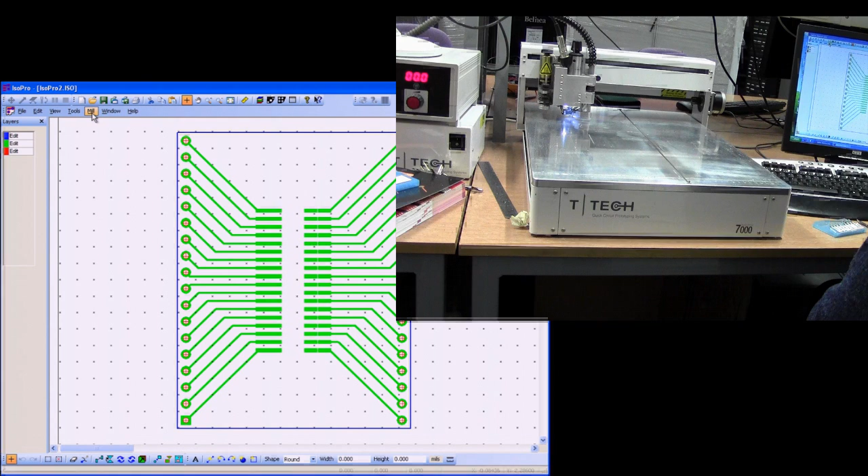And we're going to be making this board on the CNC, so I'll show you how to isolate it, set the tools, etc. and start milling. So, the first thing that we do, introduce you to the milling machine. Here we are. First thing that you need to know, this is the Y direction, and this one is the X. It's actually reversed from the standard, so it's Y and X, and that follows through on the screen as well, so you don't have to get too confused.

At the moment, the milling head's all the way at the back, so we can place some material on the bed. And when you place material on the bed, you always do it down this centre line here. So, if you've got a double-sided board, you can flip it on the centre, flip it that way. And we're going to be making our board on this here. This is a single-sided FR4.

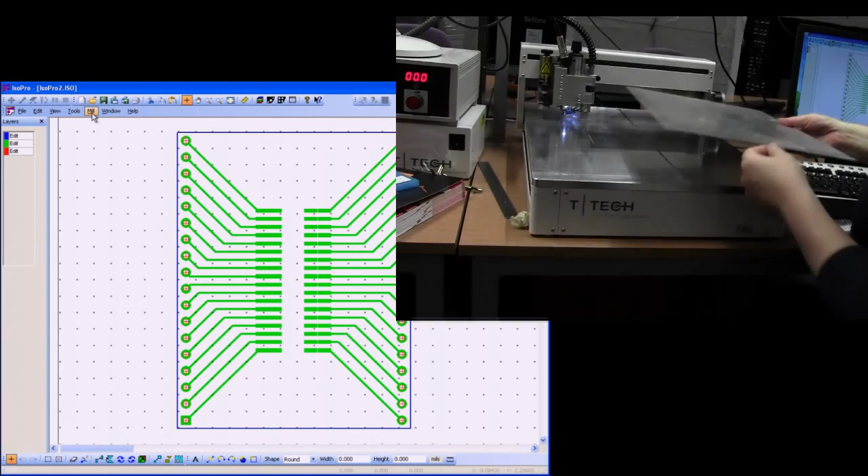Now you don't mount the material directly onto the bed. Why? Because if you drill through, you're going to drill into the bed. So, it's very important to use some of this stuff. This is backboard, and you mount it using pins. You've got pins like this, place the pin into the first one, into our origin, you place the backboard on, and you place your material. Now this one's already been pre-drilled. You've got a pin hole at the front, and a pin hole at the back.

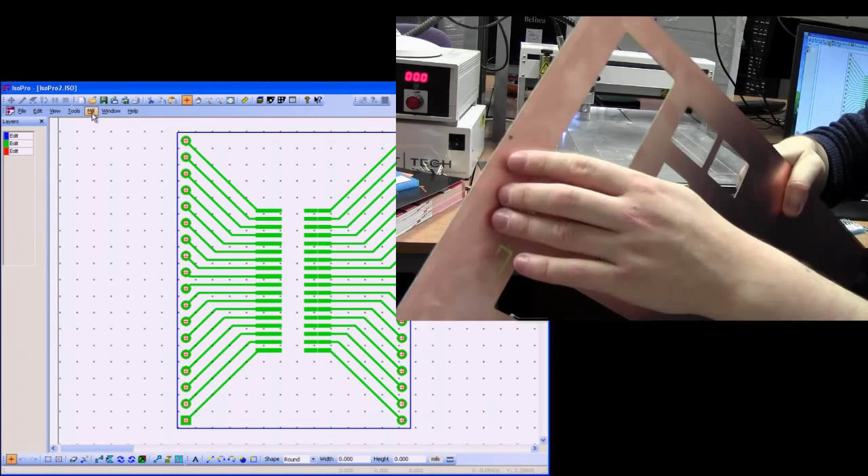So we can slap that on top of our backboard. That way when we're drilling through, we just drill through the PCB into this backboard, which is replaceable. And grab your other pin. All you do is just line up the holes at the back, slide it through your sheet of material and into this bar. Now this board doesn't move at all, so it's all aligned to the centre. So we've got our centre line, our imaginary line going right down the middle.

Masking tape, always use a bit of masking tape just to hold the board in place, just in case it does spring up. So, make sure that you tape it down. Don't tape it to the backboard in case the backboard shifts. Always make sure that you tape it down to the bed. The worst thing that you want is for this material to actually spring up, catch on the tools or on the milling foot and do a little bit of damage to the machine. So make sure it's all taped down.

Now it's very important to keep your material as flat as possible. I don't know if you can see at the back here. You can push this down, you've got a gap underneath the mill foot, it's actually hitting the foot. Same down here at the front. You've got a slight rise to the board. Now it might not look much, it might only be 0.1 millimetre, but you have to remember that you're only cutting through the copper surface, and that is only 0.1 millimetre.

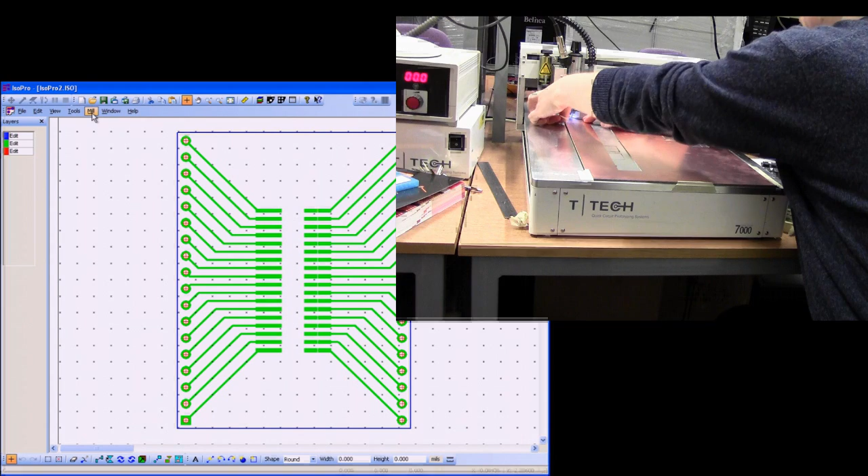So if it is raised slightly high, you can start milling the top surface here, perfectly fine. It's quite higher. When it gets over here, it's a little bit lower, where it's flush to the backboard, and it's not going to mill, so you set your height over here. So always make sure that your board is as flat as possible, and tape it down in the areas where it's particularly bad. Normally that's the corners and the edges. So our board is all taped down and in place, it's not going anywhere, it's pinned. We're ready to initialise our milling machine.

If your board hasn't got any of these holes, the pin sizes are 125 thou, working imperial, and this one's the drill, and there we have it, that's our 125. We use that to make the holes. If you make the holes the same size as the pins, everything fits nice and snug. That's how we want it.

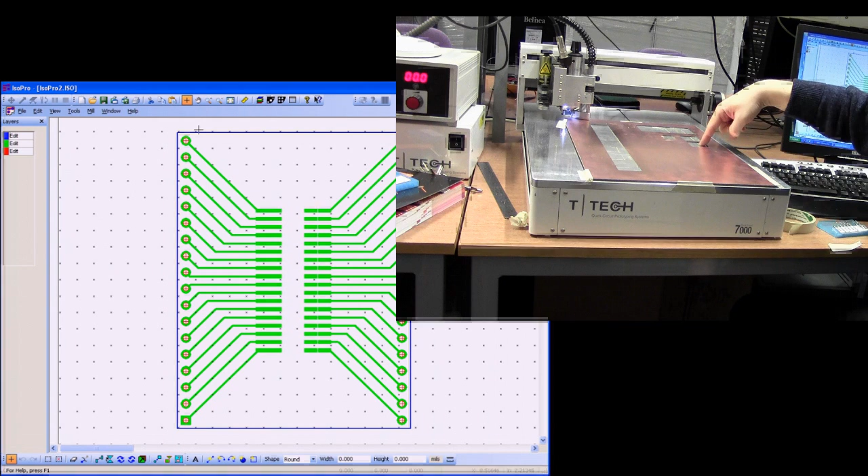Now then, where do we place it on the material? We want our circuit board to be conservative, we don't want to waste material, so I'm going to place it, say, down here, next to this little cutout that I've already done, this little PCB here that I've chopped out, and make it just below here. It's only a small one, it won't take us too long. How do we place it there?

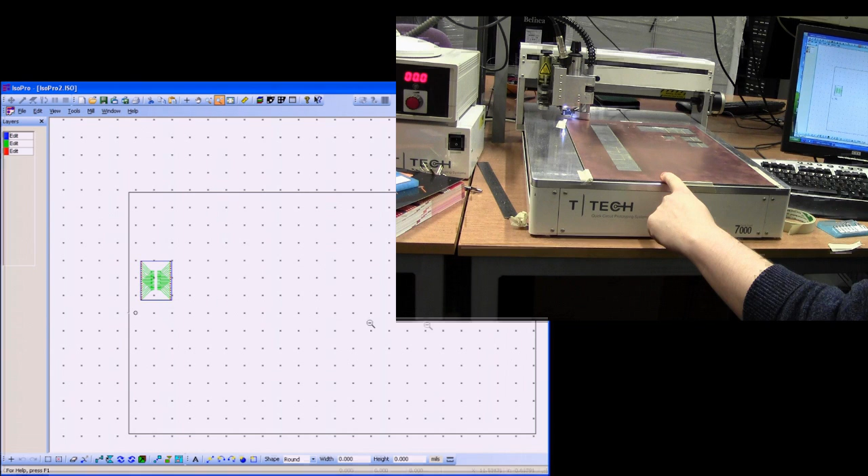Well, we place it there the same way as we do in our software. At the moment we're zoomed all the way into this PCB, so you can't see the outside area, so if we zoom out, here we are. This is our bed, and that's our design. At the moment it's positioned somewhere just here, just above our centre line. You can tell where the centre line is because we've got two circles.

You've got one here. This is our alignment pin back here, and a little circle further back. This is our origin, which everything's actually measured to. If you move your mouse over that, you can see it's almost 0, 0 on the screen. So that's our origin, that's what we measure everything to.

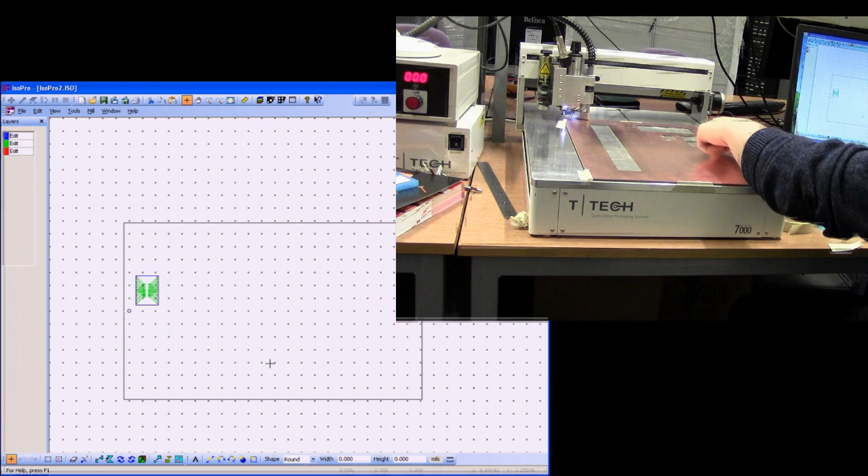Zoom out. Alright, here we are. So that's our board. We want to place it somewhere down here, somewhere around here. See, it's on the screen down here.

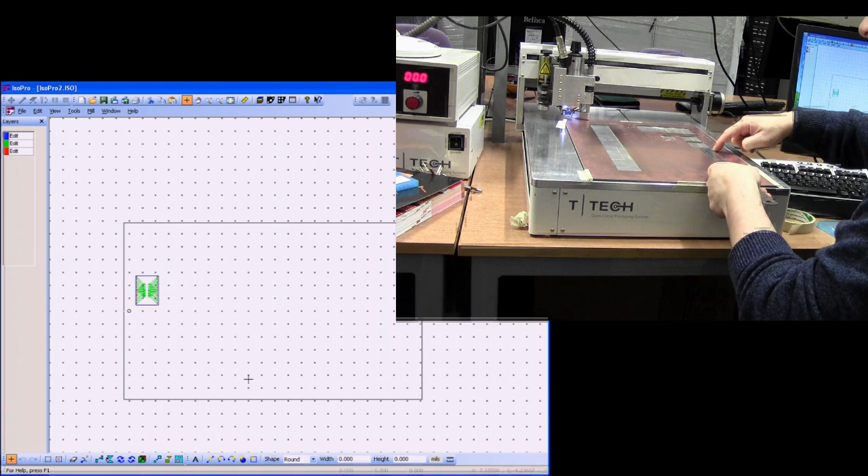So we get our ruler, the steel rule, and measure from the bottom corner, this back edge here. We want to place it close to where we had this PCB, so we measure this back corner and move this one down to where the back corner should be. It should be roughly about 13 centimetres down, so I want to leave a little bit of room, and I want to go about 22 centimetres along.

Make sure that all your layers are in edit. If they're not, right click and say edit all. Box round the lot, select the lot, we'll zoom in a little bit, say to there, so that we can place it a little bit more accurately. Grab the board. There we go, so we've got our board.

All of these X-Y positions down here are relative to our origin, so we can move roughly around a corner. We can move it down to about 20 along, 10 down. As you notice, I am in mils, so I want to change that to millimetres. So roughly about, there we go, 25, 12 down, somewhere around there, it's good enough. So that's where we want to place our board.

So we're ready to start processing this PCB. Now, this is the top side of my PCB, surface mount, so I don't need to flip it because I'm not working on the bottom side. If this was a single-sided design and it was through hole and this copper was on the bottom side, I'd have to mirror this.

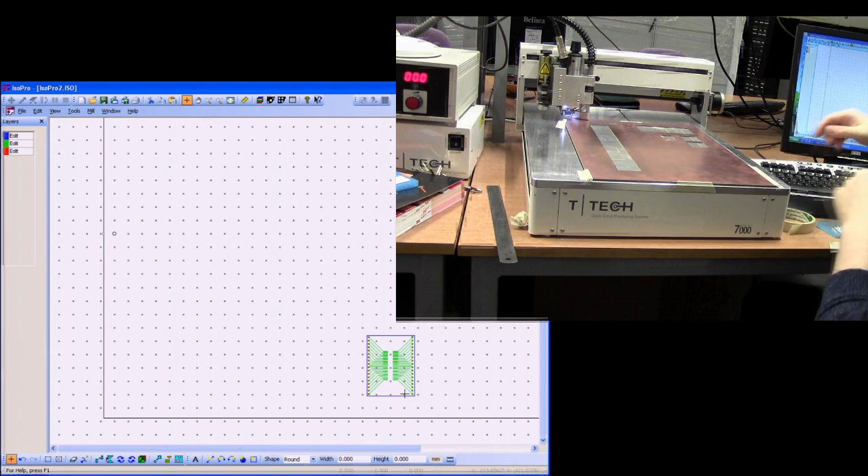Just like you would do for etching, if you were working on the bottom side, you mirror your bottom side, so that when you flip the board back and the copper's at the bottom, everything's the right way round and orientated correctly. But in this case, I don't have to mirror. If you do have to mirror, you've got the mirror function down here, and it gives you a little tooltip called mirror.

The one next to it is offset. If you did want to place this board a little bit more accurately, you can use the offset function and click on that. Probably not, because I haven't got the machine initialized. But you can do an offset to set values and so on.

There's the mirror. As you can see, if you hit the mirror, it flips it, so you're working on the opposite side. Flip it back, it flips it to the top, because we've placed it down here. If you flip the material, what was here is now up here, so it mirrors it to the top and there's no shifting about. It does mirror it around the centre line, but I don't have to mirror in this case because I'm working on the top side.

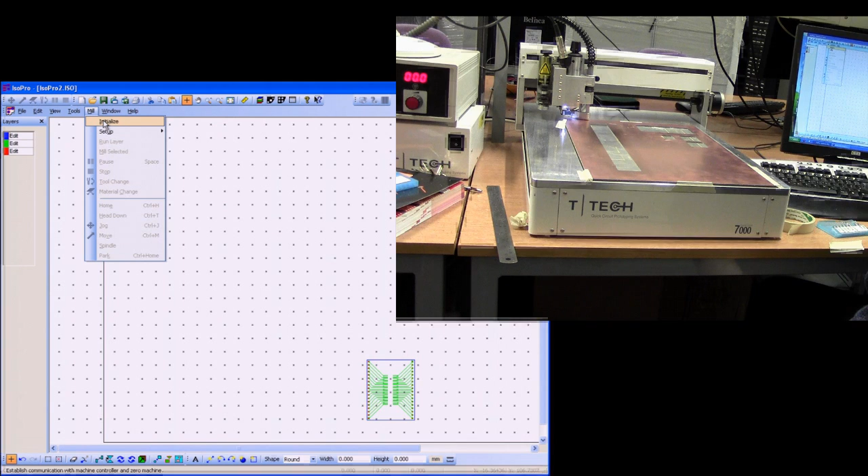Now then, working down here, we need to initialise our milling machine. So switch everything on: switch the speed controller on, switch the vacuum on, switch the control box on, which everything plugs into, and we initialise.

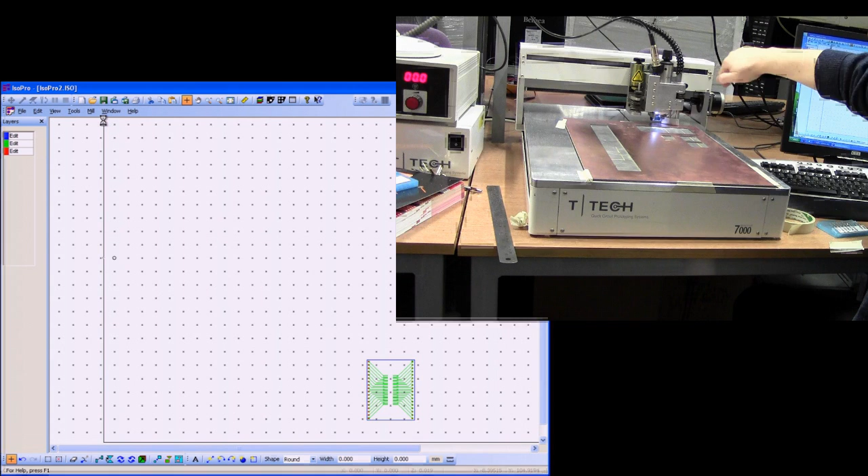The program will shift the mill head all the way across to the right hand side. It will juggle it a few times to make sure it's at its maximum. It'll bring it all the way forward, same thing down here, and it will count back until it gets to its origin. So it zeroes the head, sets its home position. If the machine knows where 0 is, then all our measurements, just like our curve with X and Y, are taken from the origin. It knows exactly where everything is. It is quite accurate.

Come on, hurry up, it's so slow doing this bit. But it needs to be.

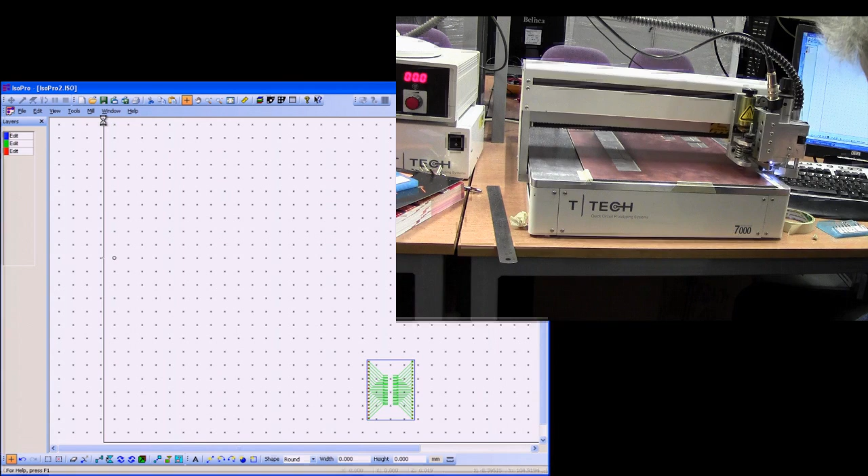Raise it forwards. And there we go. And here we have it. Milling head, everything's all centred, and as you can see, the chuck is slightly back away from the alignment pin. That's because the zero hole, our alignment hole which I showed you back here, is our origin alignment. Okay, so that's all set up.

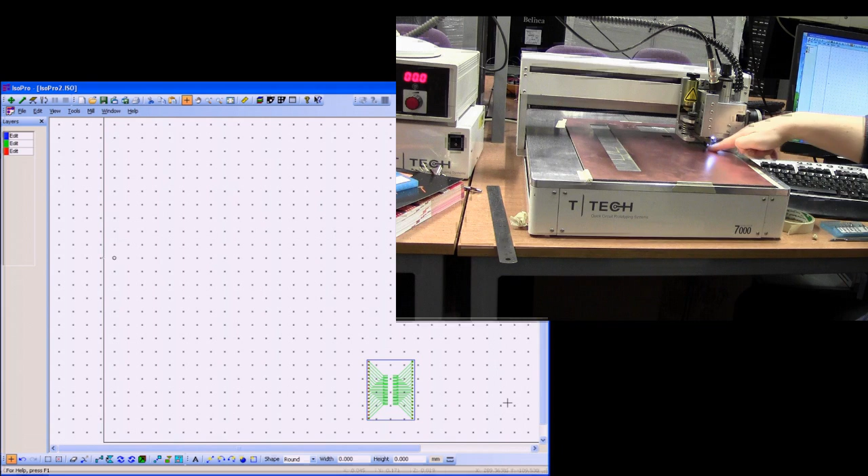What we can do is right click on the bed now, because our milling machine is active, and go down to machine and jump to cursor. I suggest you jump to cursor on the corners of your PCB design, and it moves the mill head to where the corners of your design are, so you can see exactly where it's going to sit on the board. So just like I said, roughly 22 back, 13 back.

It's slightly beyond our previous one, to the bottom corner down here, like we said. If you jump the cursor to various other areas... oops, that was a mistake on my part. I think I jumped to mirror the cursor. Let's try it again. Oh, bloody hell! Alright, reinitialize.

That jumped into the wrong place. Little hiccups like this do happen on CNCs. They're not infallible, but just like etching isn't infallible, CNC isn't infallible either. But once it is on the go, it is on the go.

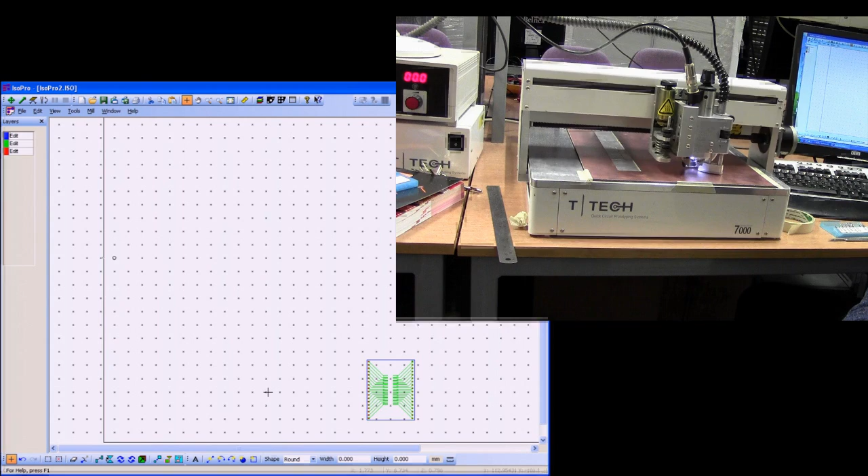Okay, so again we can do machine, jump to cursor. It's just there, let's try and jump it up there, machine jump to cursor. This isn't right, what's going on? Something peculiar is happening here. Whoever used this looks like they've really done the job on it. It might turn into a debugging thing. Alright then.

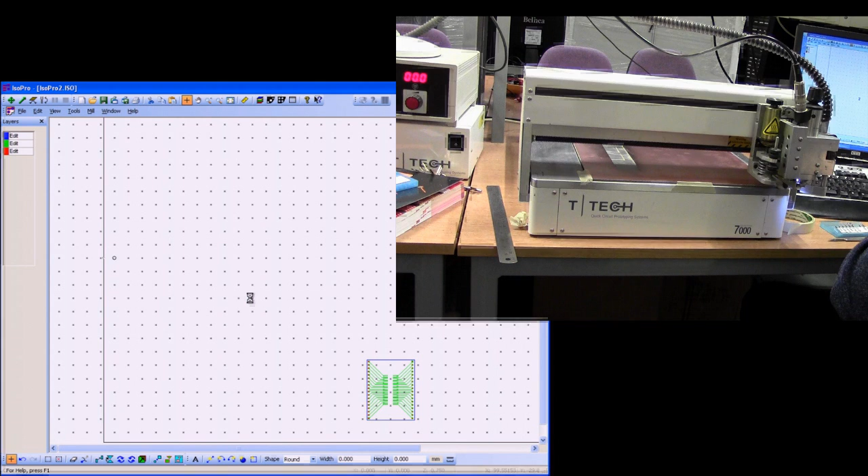It looks like the X and Y is switched. Why is it doing that? I do not know.

Let's have a look, we'll do a jog. Jogging the minus Y, which should be that direction. Y is in that one, X is there, minus X, continuous. That looks right.

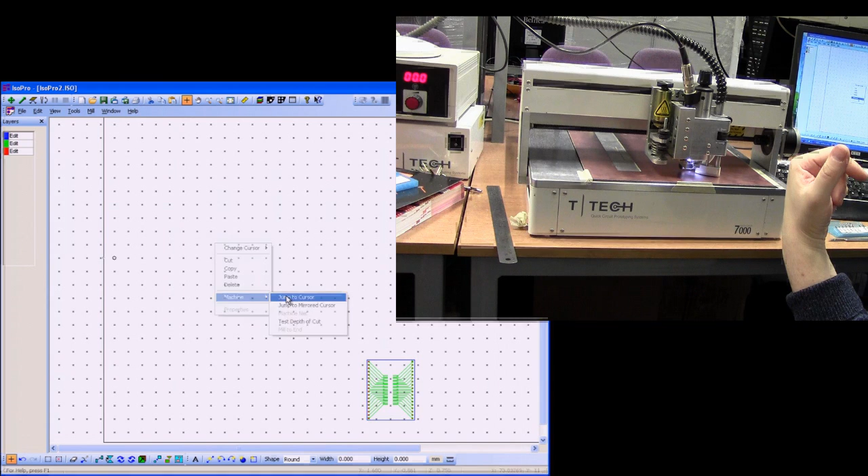Yes, that looks okay, yep, everything looks okay now, so why is it doing it in that corner? Let's have a check now, it's always good to run through this.

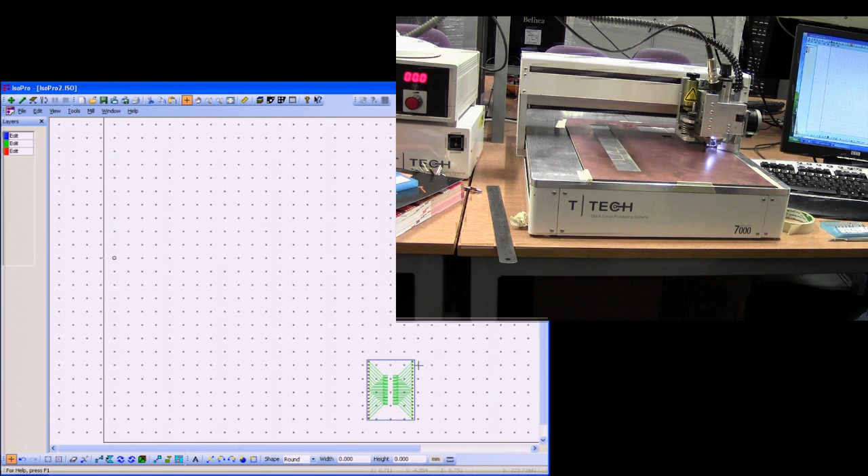That's our top right hand, bottom right hand, bottom left hand, and top left hand side fingers. And there we go, it's working properly now, and as you can see, it's going to fit onto the baseboard perfectly fine. I'm not too sure what happened there.

It's all running okay, no problems there. Looks like they're a little bit buggy to start with. Friday morning, no one likes Friday mornings. Right then, moving machines don't like Fridays, they can't wait till the weekend.

Right, so the circuit board is all placed down here, it's going to be cut in this position on this board. What we need to do is start giving it some tooling information. Zoom into this. Drill holes, you don't need to touch the drill holes. The drill hole NC drill file is already in the correct format for this machine to work with. Brilliant, you don't need to touch it, so you can hide that one for the time being.

Okay, that just leaves us with a board outline and our top copper. You can view the board outline, because we don't particularly want to edit it or do anything with it, we're just interested in the top copper. What we want to do is get the machine to generate our isolations. That means we tell it a particular size tool to use, whether it's an end mill or a T cutter, a T8, or a universal cutter. End mills and T8s, let's say, for this machine.

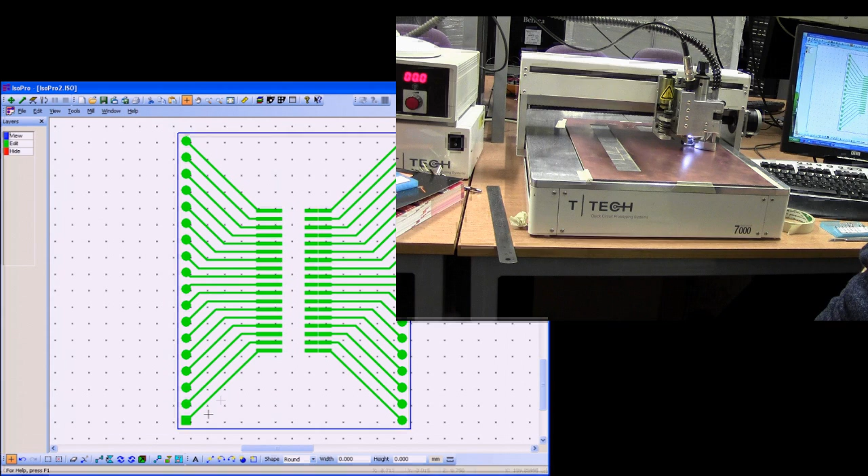It isolates this track, and it does it for every single track, every single pad. Wherever you've got a pad, it will isolate around it like a 31 thou. And you do that by selecting isolate.

Now we want to set our tools. We work in thous in this, in mils. You check that back - there we go, we're working in mils.

We're going to use a T8 for this. I'll show you how to set up a T8, because we're going to be using end mills in this as well, and this point is doing it all in end mills. So we'll do a T8 tool, and we're going to set it to do a cut of, let's say, 10 thou - 0.254 millimeters, 10 thousandths of an inch.

Next tool up that I'm going to use is a 31, and the next one is a 62.5 thou. So those are the tools that I'm going to use.

What I want to do is select and remove redundant data, so that when it processes these tools, wherever a 10 thou or a 62.5 can go, a 31 doesn't have to cut. Wherever a 31 goes, a 10 thou can go as well, but it won't cut the 10 thou - it will only cut the 31, and so on. So it only cuts in the areas where the tool fits. The reason it does that is because we want to reduce tool wear.

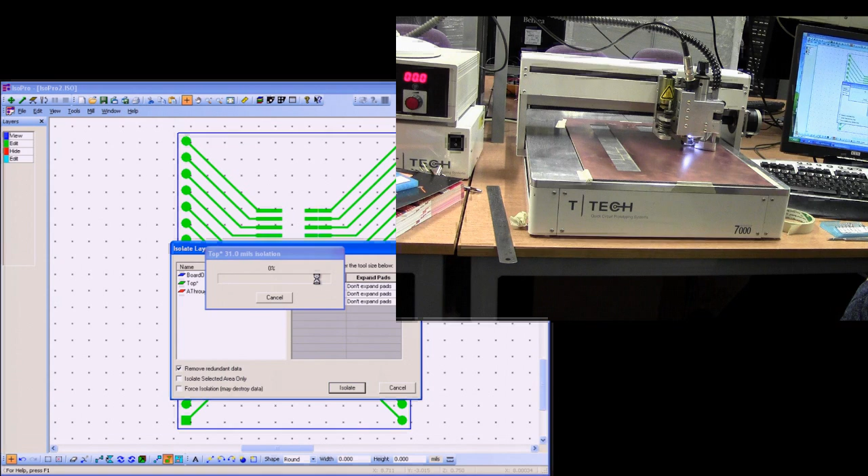So we set our tools, we've done remove redundant data, and we want to isolate the top layer. So we select top layer and isolate, and off it goes, chugging away. It does the 10 thou isolation, then 31, and so on, remove redundant data - which is all it has done. Then it does a 62.5, remove redundant 31, and here we have it.

So it runs the 10 thou in between and around pads, does the 31 thou just up and down here, and the 62.5 thou around the outside edge. It's all colour coded down here. And the thickness of these tracks are actually relative to the thickness of the tool.

So you can actually see where it's going to work and cut. What I can do is hide all these and just view the 10. There we go, this is where the 10 is going to cut only. Hide that one, view the 31, that's where the 31 thou is going to cut. As you can see, it only uses the particular tool in particular areas where it's actually needed, and that's really, really good.

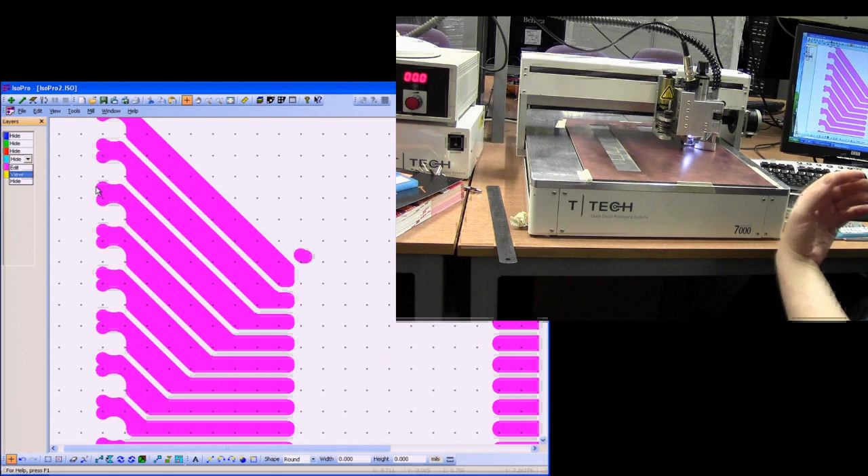Because one, it speeds up the milling, because it doesn't repeat steps. And two, it saves on tool life, because it's only using the tools as and when it needs to use them. So let's get rid of that, right click, view all.

Okay, so it's isolated all well. Like I said, you can leave this copper, where this white area is, it's going to leave copper. It doesn't really matter too much if you leave that, because it's actually insulated or isolated the copper tracks. But in this case we're going to use a rubout, which is down here, and rubout uses the last tool in your tool list.

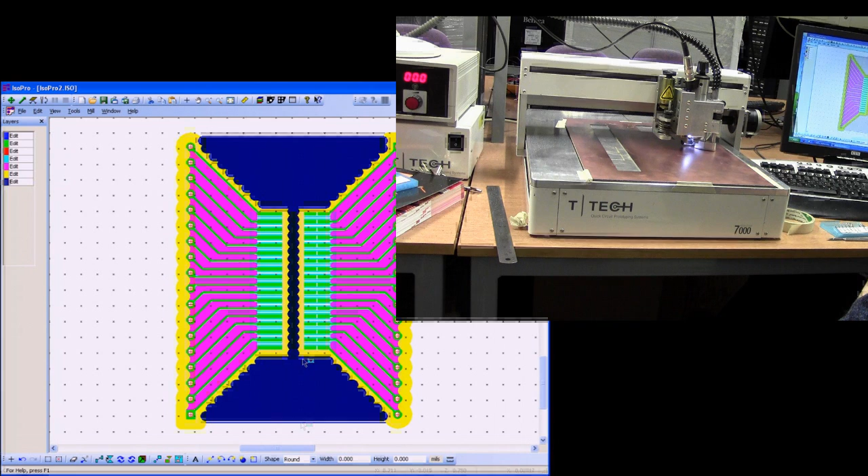If you draw a box, okay, and make sure that you've got edit switched on, draw a box around and edit, it will run that large tool and it will clear out remaining copper. And there we go.

So that's our board all isolated, all drill holes are in there. There's only one thing left to do, and that is our board outline. Now I've cut the board outline with a tool size of 62 thou. Don't bother removing redundant data because it's the only data there.

We select our board outline and we do isolate. What to do, I'll run the 62 contour router. Use contour router for chopping out boards, like I said before. And what will happen is it will do an inside and an outside, because it's not a filled shape.

If we hide all this, we just view that one. There we go, you can see your board outline there. It does it on the inside edge of this outline and the outside edge because it is a line, and you've got two sides to a line. So, actually I should have said this before, but you can edit these isolations if you want.

You can select things that you don't want to cut and things that you want to cut. And here we have it, we have our outside edge.

Now the trouble with this is, if you try and chop this out of the board as it is, once you clear down this side and clear out the area, this board is free. It's no longer held in place, it's not attached to this material, so it can slip, it can fly off the board, it can get pulled up into the chuck. A very bad thing to do.

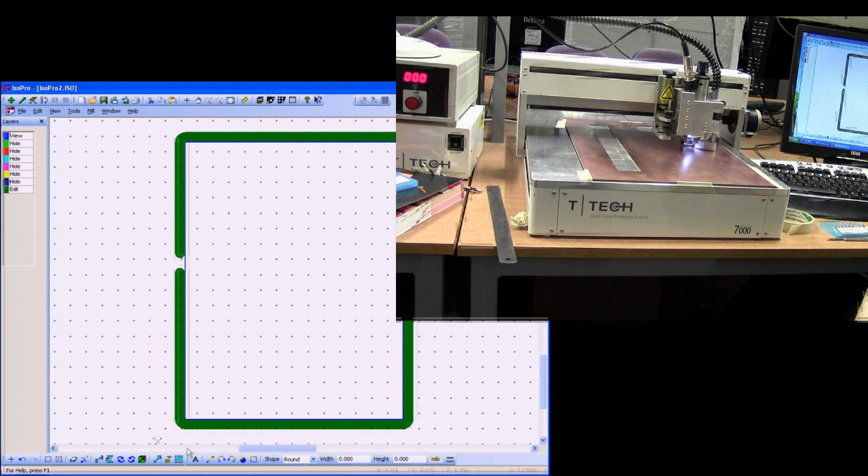So the board is firmly fixed into the material, and all that you've got to do is push it out at the end, just break it out. So here we have it, this is our board completely isolated, drill holes all done and everything.

What we've got to do is tell the machine to do that. So what I should do first is save this, save your work in case anything happens, and we run our first layer. But before I do that, let's get the tool into the chuck and the head all set up.

Because what we want to do, take a look at this here, this mill head. It's very important that it sets up properly. So I'm going to zoom into this.

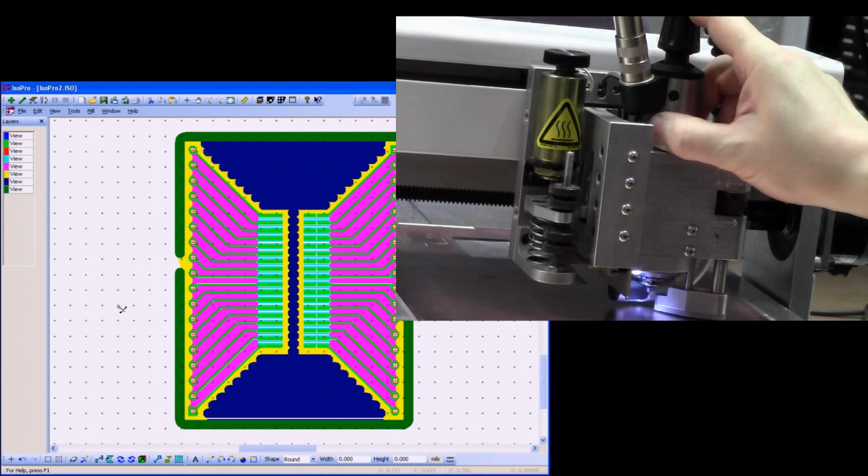So we've got the anatomy of our, there we go, right then. So we've got our chucks down here, what we've got our tools into. You fit your tools into the chuck, you open and close it by using this up here, this section, okay? Push down the knob at the back. It can be a bit tricky, there we go, push it down. That engages your chuck head with the opener, and you can open and close the chuck head. You can insert your tools.

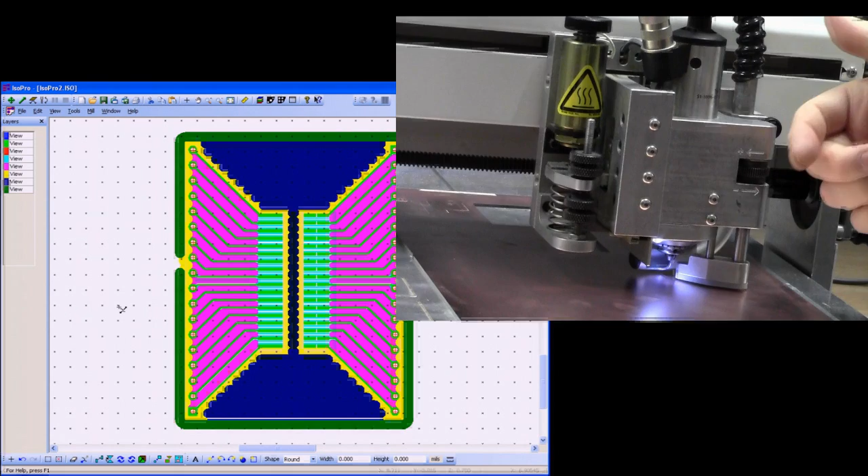Over here, this is our solenoid. This is what actually controls the up-down motion. So you use this to set various heights, depending on how high or how low the tool is set to cut into the material. Over here, this sets our maximum and minimum throw on the mill head, how far it can travel up and down, its maximum.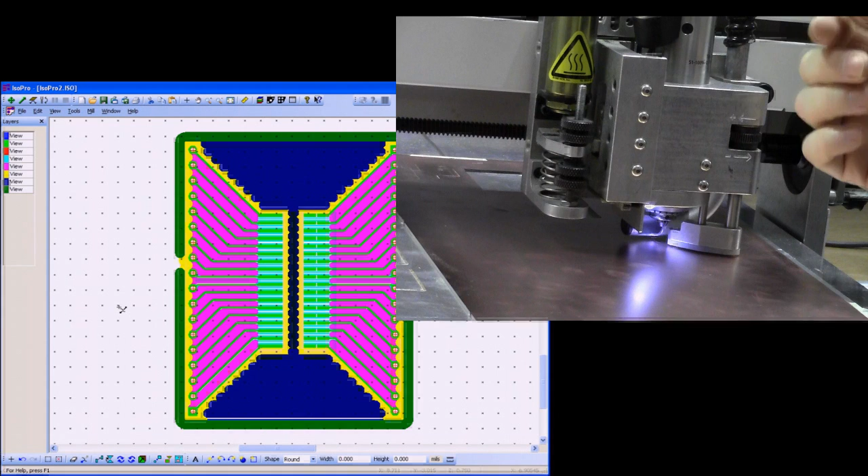And you set this relative to the material that you're using, the thickness of the material, because you don't want the mill head to go all the way down and risk hitting the steel bed. That's bad news, because it's expensive to replace. All that you want to do is just set it so that the tool just cuts through to the baseboard.

Okay, another one, you've got this, that's what controls the knob at the bottom. Knobs at the top control how high the mill head is off the board, and you want the height to be adjusted so that your contour or your drill bits are hovering just above this material. We'll set that in a moment.

This knob here controls the foot height, the pressure foot. When the mill head goes down, all the forces are resting on this foot, and it's this foot that actually gauges how far you're cutting into the material. So the further up this foot goes, the further down the mill head is allowed to travel until it hits this stop. This is what we call an emergency brake, if you like. It doesn't go beyond this, but it'll go down to the foot.

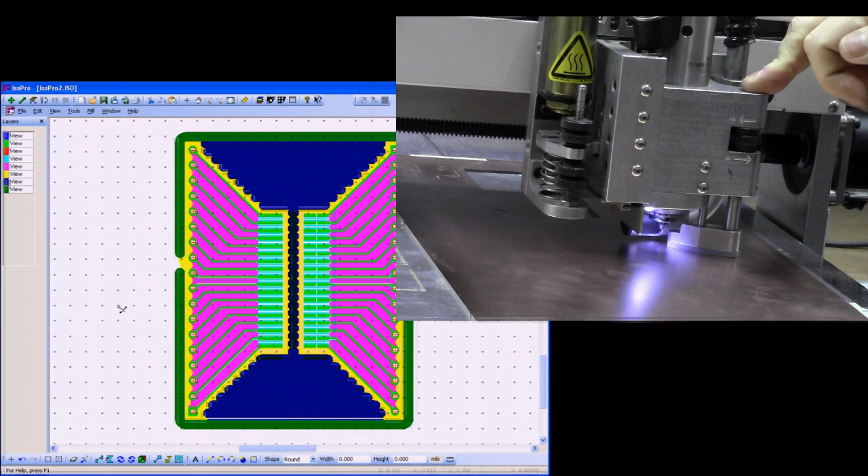The foot serves two purposes. One, it controls, like I said, cut depths. The other purpose is that it pushes down on this material and keeps it as flat to the board as possible. It's really, really important, because you don't want the material bending up or bowing or walking out of position. You don't want any curvature to the board in any direction. You want it to be flat, and the pressure foot will do that. So when this is down, it will keep the board flush to your baseboard. That's basically the mill head.

So, first thing that you do when you do a PCB is drill the holes. So, we do a tool change. That just brings the head to the front. Did I really want to do that? No, I didn't. I don't even know what tool I want to do. So right, cancel that.

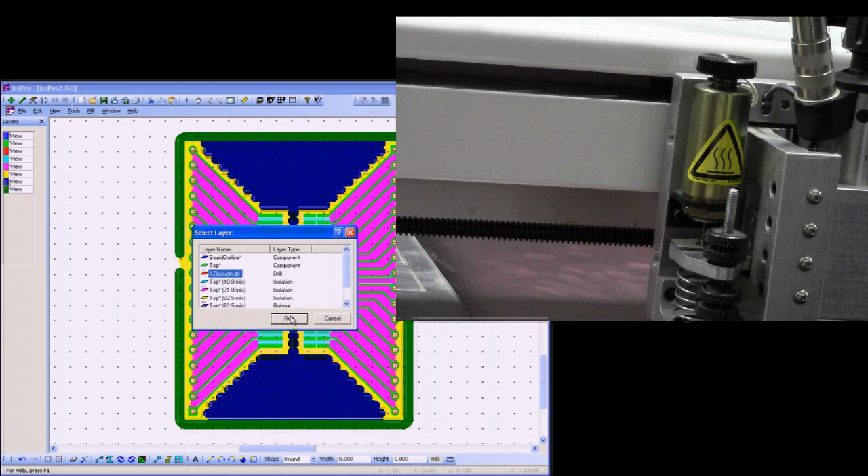Mill. You want to run a layer. So we want to drill these holes. I'm getting ahead of myself. So we want to select this one, AThrough.drl. This is our drill layer. Like I said, you don't have to do anything with the drill layer. You can run that, and it pops up with our next window.

It says insert a 35.4 mil tool. Unfortunately, I don't have a 35 mil tool, but I've got one close. It's a 39. It's a hole. It's going to be out by 2 mils on either side. It's not a big deal to go through.

So push down on your release. Tool into the bottom. Make sure it goes all the way to the top. Tighten it up, and you pull up to engage the head. So when you turn this, it's not going to spin. It's very important that this is pulled up after you've inserted the tool, because you can damage the motor. As it spins around, it's going to spin this head and wear down really, really quickly, and it's a new motor for you.

So we've got our drill bit in here, and what we want to do, okay, skip this first.

Do we? No, we won't. We'll go straight into it.

Okay, what we want to do first is to set the height of this foot so that the drill bit goes through this material. So what I suggest is you grab a little bit of this PCB material. Move this forward a little bit. You can't see anything, can you? What I'm talking about. Correct.

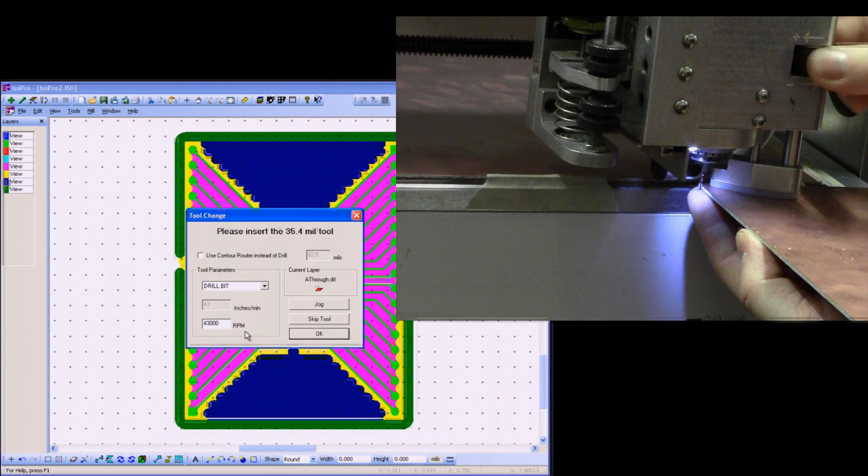And this foot here, at the moment, it's almost level with this tool, so you have to raise the foot in order for the tool to go through your board. So I have got another piece of material here. Place this to the bottom of your foot. Spin your depth wheel until you can see that.

Okay, it goes just past your board. Now you can run your finger underneath. Make sure that the tip of the drill is clearing the board, so that you know exactly if it goes through this board, it's going to go through this board. This is the same thickness of the board.

Next thing that you need to do, raise your solenoid. The head of the solenoid, you want to unscrew it. So, actually, we need to look at that. Just get a little more. There we go. So you want to raise this wheel here, so that you've got a nice big throw on the machine. That way it will go through the board.

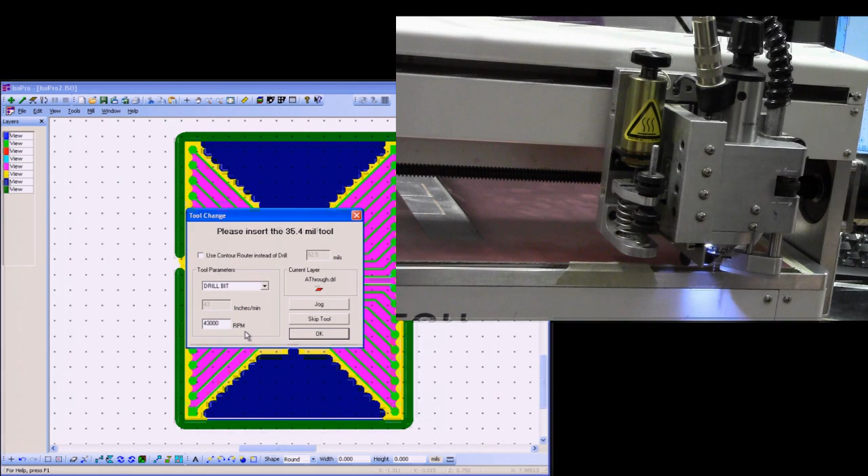And as you can see, when I push down on this, it's actually stopping on this board. So it's not going to actually go through and damage this base. It's only going to go through and mill this. So this is set to the height of the material just into the baseboard. We've got our solenoid set. Our foot's height is set, so it's going to drill through.

Next up is setting our speed. Now this is set to 43,000 RPM, our cutting speed. For a 39 thou, anywhere up around that value should be okay to drill with. The thinner the drill bits, the faster you want to cut. Medium-sized drill bits you can slow them down.

The larger drill bits, the 78.7 and 125s, I'd suggest that you run these a little bit quicker, because they do tend to skid on the surface of the copper, because there's not a lot of pressure behind them. So spin it up really fast so it bites that top, instead of doing it slow and putting a little bit of force behind initially.

This is our RPM to set. You can't change the inches per minute. This is our traverse speed. Simply, we're not traversing the head. You're drilling up and down, you're not milling, so this becomes redundant. But make sure that you've got drill bits set.

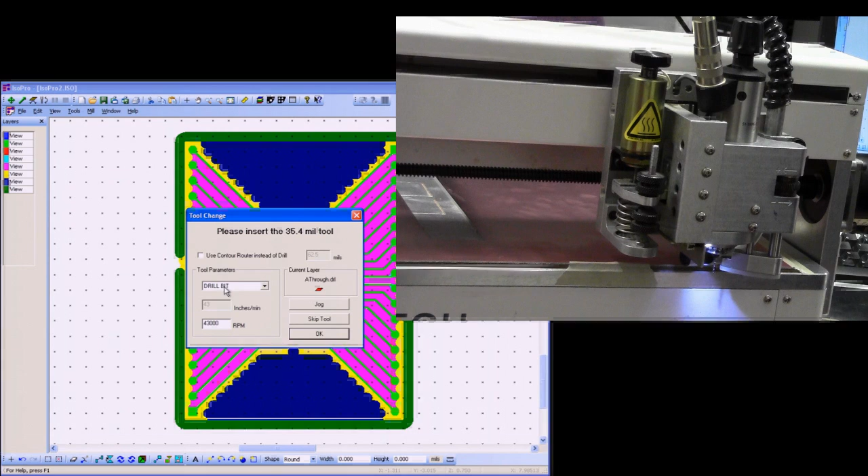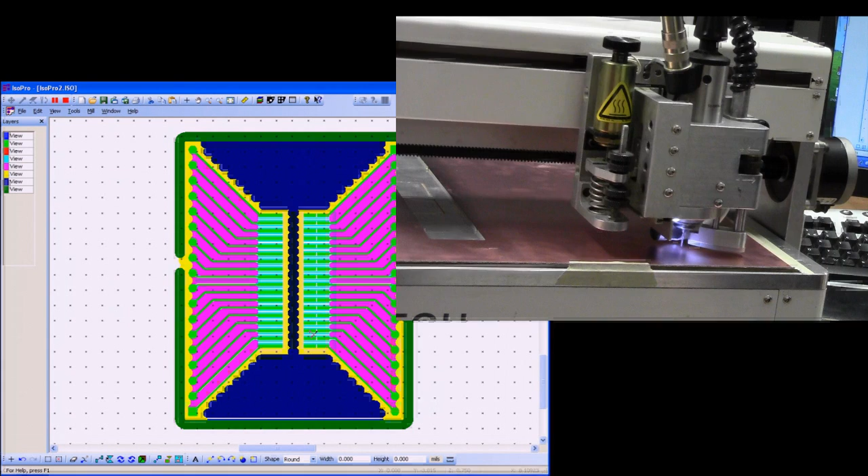As long as the contour router is below your tool size, it will use it to actually mill out that hole to the precise size. But in this case, I'm just going to use the 39 because it's close enough. So switch off this, drill bit selected, everything selected here, and OK.

It's a little bit noisy, but as you can see, it's moving across and it's going to start drilling down into the material. As you can see over here, it's drilling down as far as the foot.

Run out of power. Typical. Alright, I got it plugged in this time, so hopefully you'll see what's going on.

Right then, so we've just finished drilling out this board. You want your air duster, don't you? You just want to blow off the excess that didn't get sucked up. So all our holes are drilled. Let's move our drill head back. There we go.

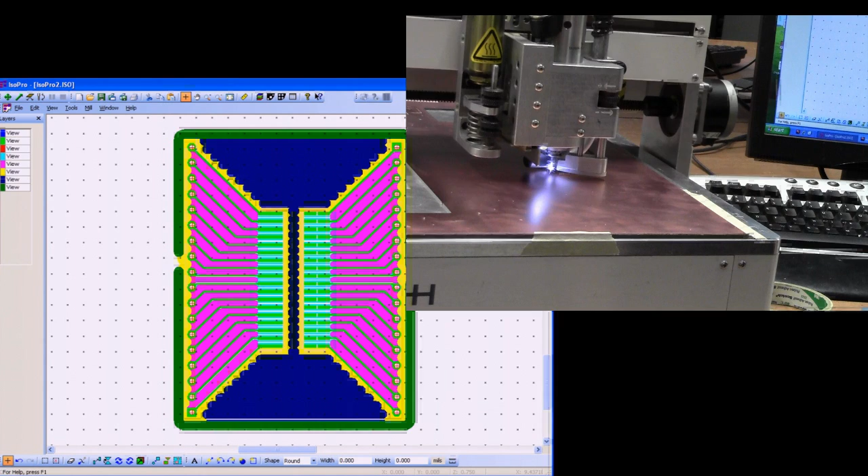And I don't know if you can see that too clear. There you go. You can just about see along here our drill holes have all been drilled. That's all lovely. Alright then. Next thing that we have to do is start doing our isolations. So now, I'm going to be close to this because we have to see the head.

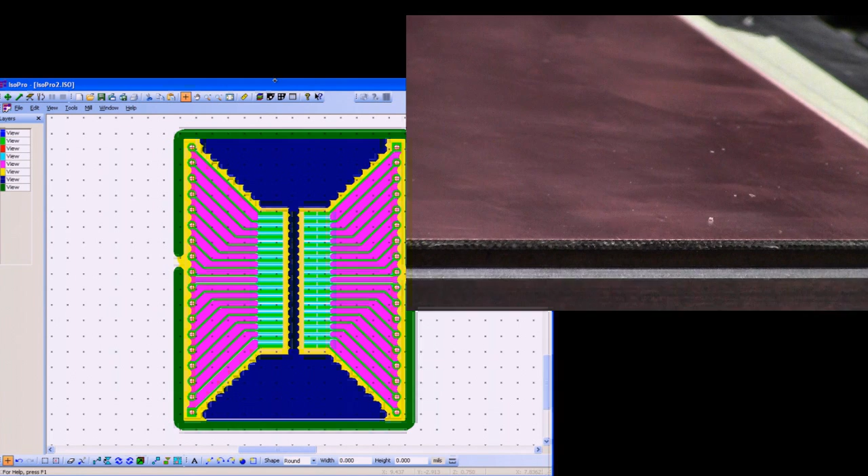What we actually do is setting our T8s and our end mills. So the next thing that we do is we're going to move on and we're going to start milling the board. Now, first tool, you work with the smallest tool up. Our first tool is the end mill. Okay, so this one down here. Okay, not the end mill, the T8. So we'll insert the T8 into the machine. So we want to do a tool change.

You don't do a run layer. Make sure it is a tool change. You want to change the tool, and you want to set the tool's cut depth, etc. Right, we'll do that now. Right then. Mill all the way to the front. Down, untwist this, hand underneath to catch the tool, and there we go.

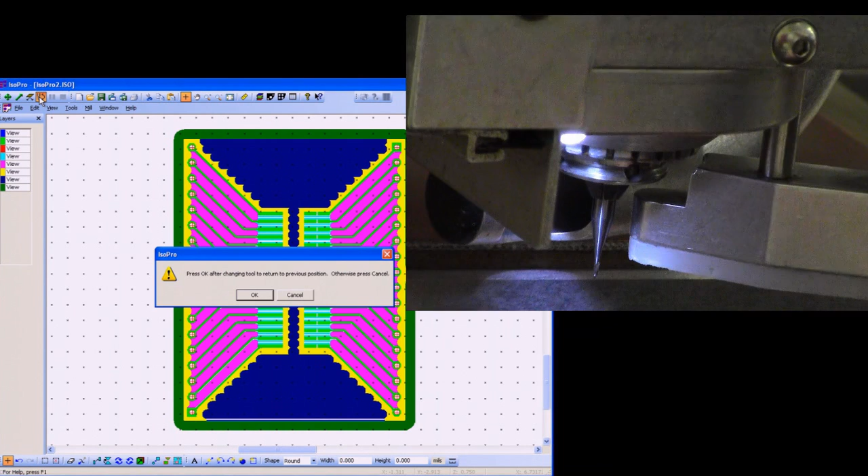So you just want to clean off the crap at the end of this bit, okay, so it doesn't collect, and put it back into there. T8 goes in, okay, we'll close this up, right, and onto the board. Okay, so we've done a tool change. And what you want to do is a test cut.

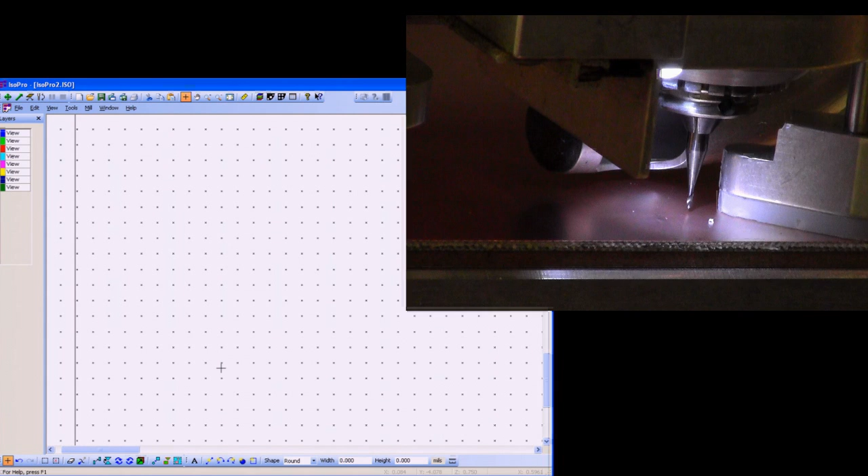So bring your mill head to the front of the board. Okay, somewhere around here. And we want to set the pressure foot so that the tool only just bites into the surface of the copper. So lower your foot first. Okay, past the mill. And push down on the top. You can see that the T8's not going to hit the board. Reduce your solenoid, so screw this in so you get a nice bit of force behind the solenoid when it's going to be cutting the board.

You want to go up to jog tool. So let's jog it into a reasonable position to start on that test cut. Somewhere there will be okay. The foot is fully on the material. Okay, so we want to set our speed to 60,000 RPM and the jog speed is roughly about 10. No, we should be able to get away with 15. And so spindle on. This is all under the jog menu. Spindle on first, wait for it to come up to speed, head down, and you want to make sure that you've got continuous set.

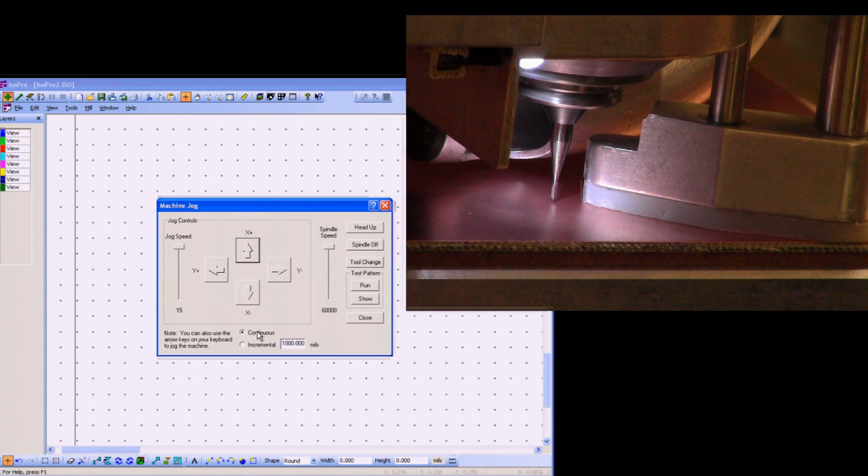So what you want to do first is to lower the tool, so you start biting the copper, about there, and then to jog the tool back and forth so you can see it start to cut into the board. Cutting there, a little bit deeper, and there we go, head up, spindle off, and we're going to just jog the head out of the way.

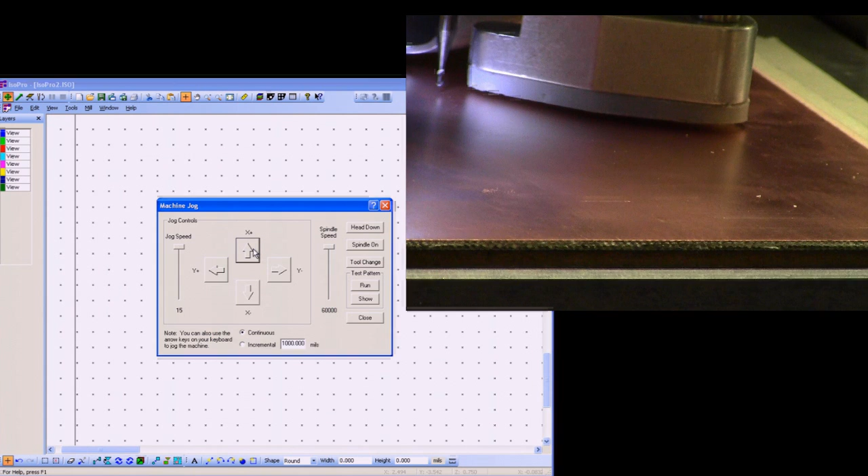Okay, so we've got a cut just here, it's just gone through the material. And you want to be able to tell whether or not it's cut wide enough. So what we use is one of these. It's a magnifier with a built-in measuring gauge. So you place this on your board. Look through it, line it up with the gauge and take a rough measurement of the cut.

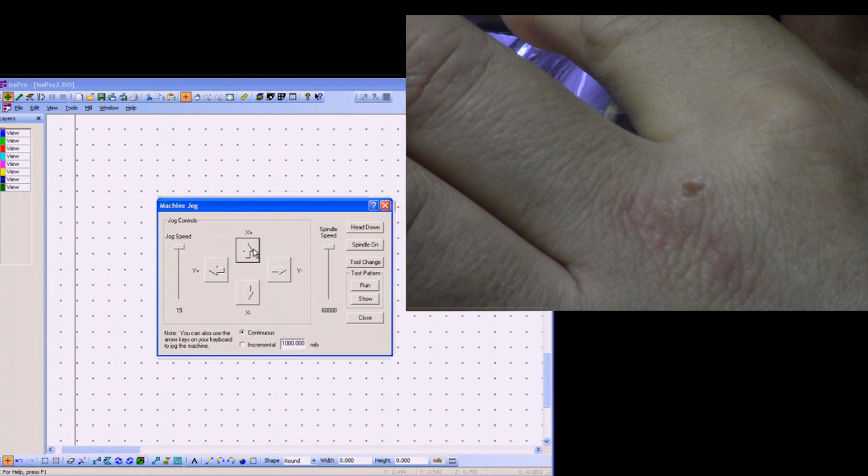So this is cutting at about 0.2 millimeters, just under 0.2 millimeters. This is cutting just under 0.2, so I want to go a little bit deeper. 0.2 millimeters is less than 10 mils. 10 mil or 10 thou is roughly around 0.25. So bring the head back, and we do another test cut.

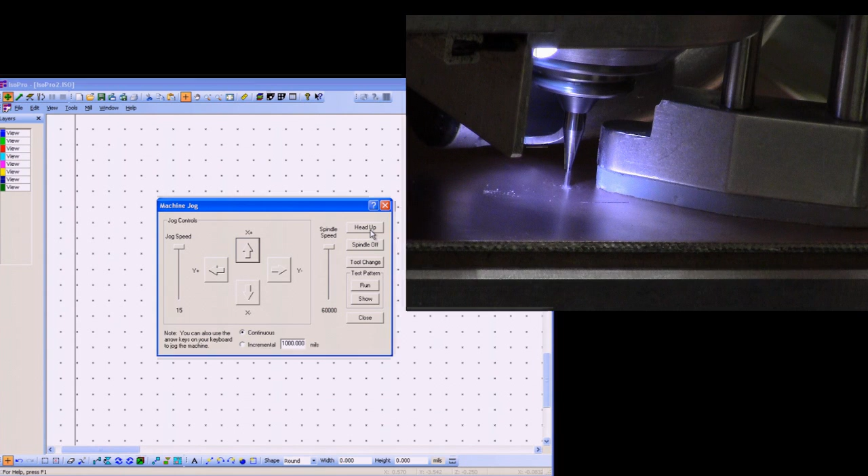Okay, so spindle on, head down, and we want to go that little bit deeper. Cutting a small little groove in the board, head up, spindle off. So lift the head back up, spindle shut down again. I don't know if you can hear me over this, it is quite a noisy machine. Okay, we'll jog this back in the X direction.

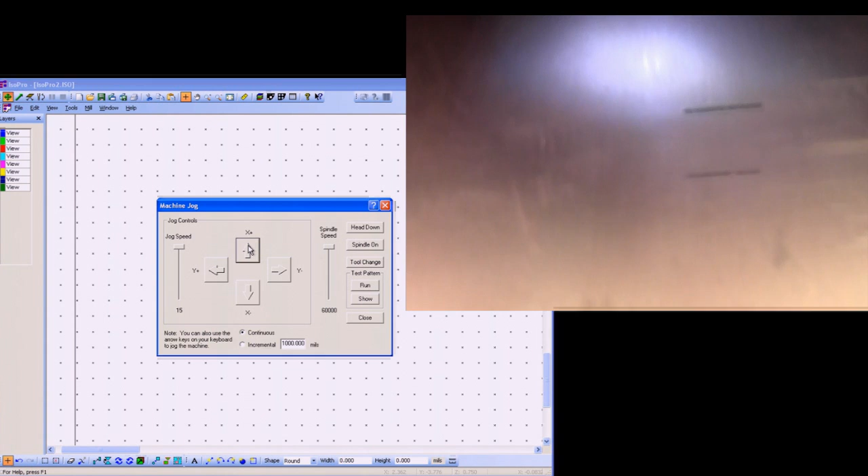Okay, so we've got another cut here. So you can actually see this a bit better. Right. Okay, so we've got two cuts here. This is our first one at the bottom. The one at the top, you can see it's a little bit wider. That's because we cut deeper on the tool. Okay, now we're going to remeasure that one and see how we go.

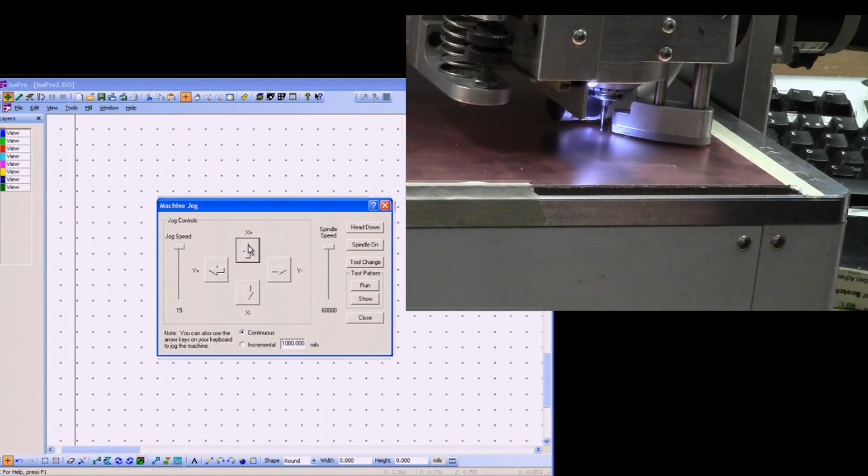So measure it, and just line it up, and this time it is cutting at about 0.25. Excellent. There's a bit of luck, getting that on the second one. Okay, so we've set the cut depth for the T8. It's going to cut our line width. So, as you cut deeper, the width gets wider because it's a triangular cut.

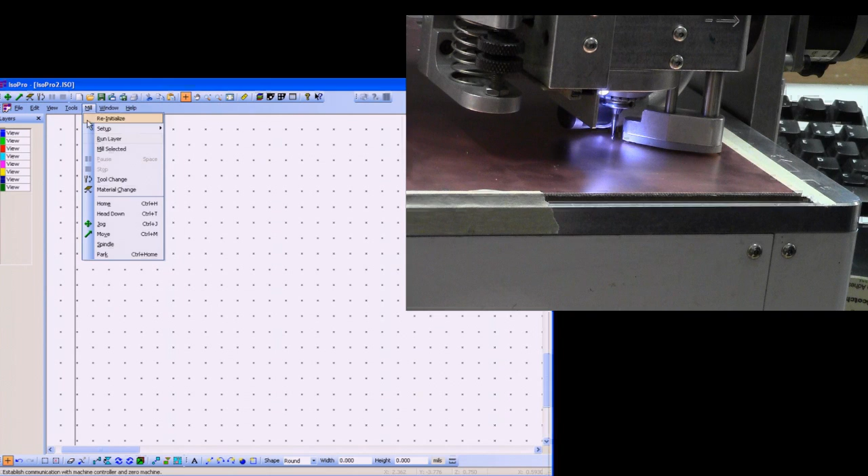You can close that. We can do mill. We can run layer now. The 10 thou. Okay, that's going to cut at 10 thou. Run.

Always bring the tool to the front, especially to insert the tool. I always find that it's best to insert the tool and set it up before you actually start cutting. That way you know that it's going to cut through the material before you do anything else. Always best to double check.

Okay, so because this is quite a delicate tool, we're running it on the very, very tip of our T8. It can be quite fragile, so we want to reduce down the speed. Cut to say 15, just like we did in the jog, and set our speed to 60,000 RPM because we want to cut very, very fast because it's quite a fine cut. In this case, we need to make sure I set it to a pointed tool first. Okay, it's a T cutter.

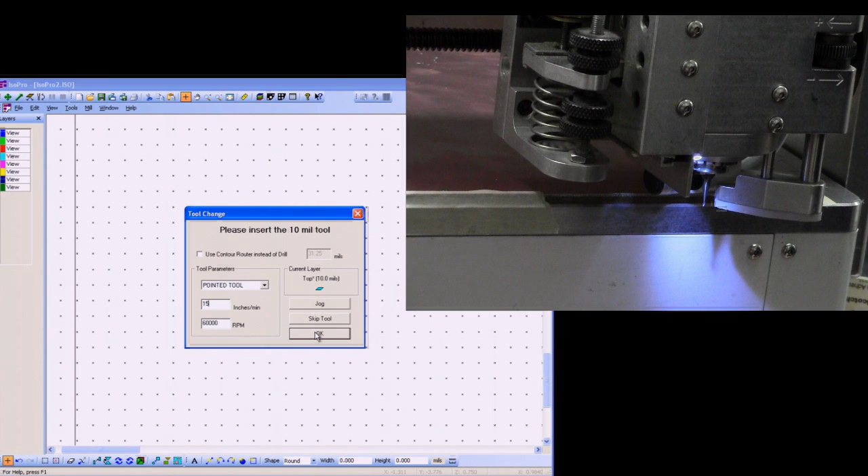60,000 RPM, so it's traverse speed. This is how quickly the mill head's going to move backwards and forwards in the XY direction. Okay, and it will go off and mill our board. We don't need to set the height or anything because we've already done that. So, okay.

So it's only cutting in the areas. You can see on the screen the blue area slowly highlighting in where it's cutting. I'll buzz through that, and then I'll stop the video. Okay, so we've done the 10 thou now. Now it's on to the end mills.

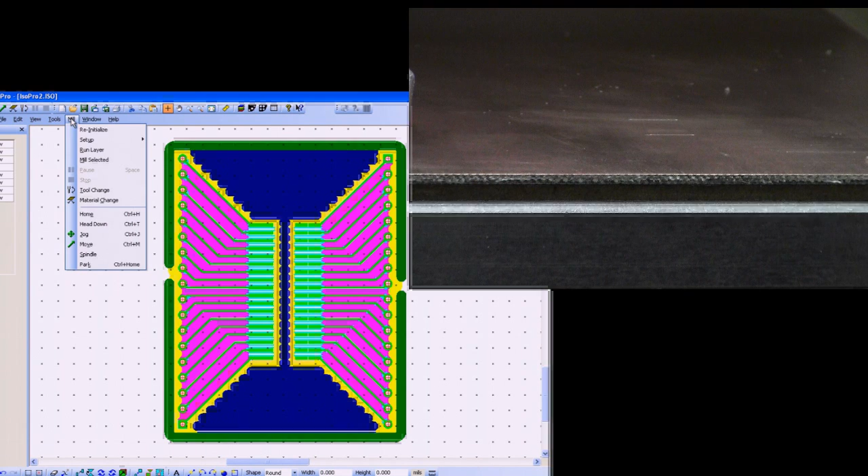Now the end mills you don't have to measure the width of the cut. All you have to do is measure or observe to make sure they're actually cutting through the material, because they have a fixed width. So we do our tool change as usual. Come out, T8's out, and the 31 goes in. And we'll screw that one in, and there we have it. 31 thou is in, because that's the next tool that we're going to use.

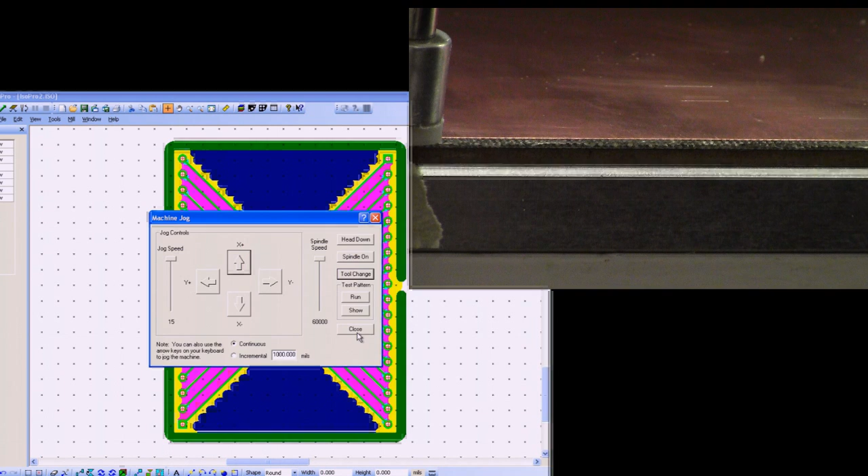So again, lower your foot, and then bring the tool down so it's just above the material so that the foot hits before the tool does. You shouldn't have to adjust the solenoid or anything because that's already been set and everything else has been set. So spindle on and head down. What you want to do is make sure it bites the top of the copper.

So just biting the top of that, and just like before, jog it to make sure that it's touching the top. It's not quite touching. It's just skimming the surface of the copper at the moment. Go a little bit deeper. And there we go, it's cutting through the copper now quite nicely. Maybe a little bit deeper. There we go.

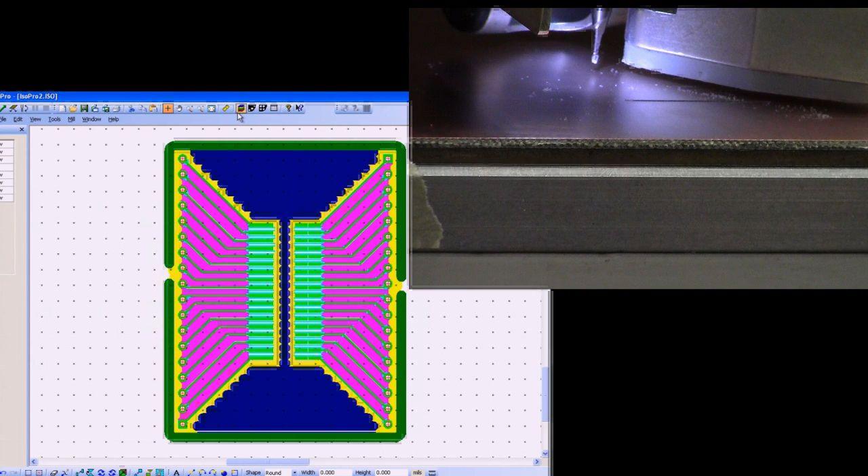So it's mill, run layer, top, and you do that one exactly the same for the 625 and the top rub out. So we'll buzz through this one quickly. So run that one. It's an end mill, so make sure the end mill is set. 49,000, perfectly fine for the 31 thou drill bit.

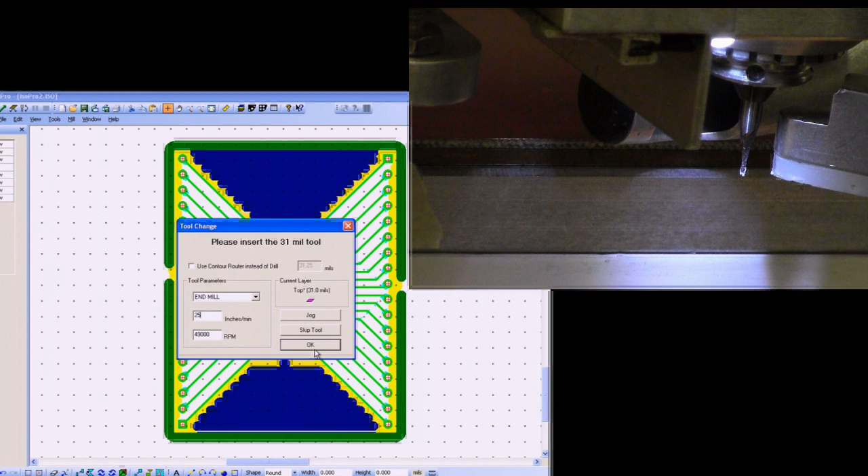You don't want 60 inches per minute. That's quite a fast traverse speed. For the 31, say 25 inches per minute. Okay, and off we go. So we've done all of this blue area here, the light blue, and now we're going to do this area.

Removing all that excess copper that's going in between them. You can see this is a lot quicker than the previous one. Almost done one side already.

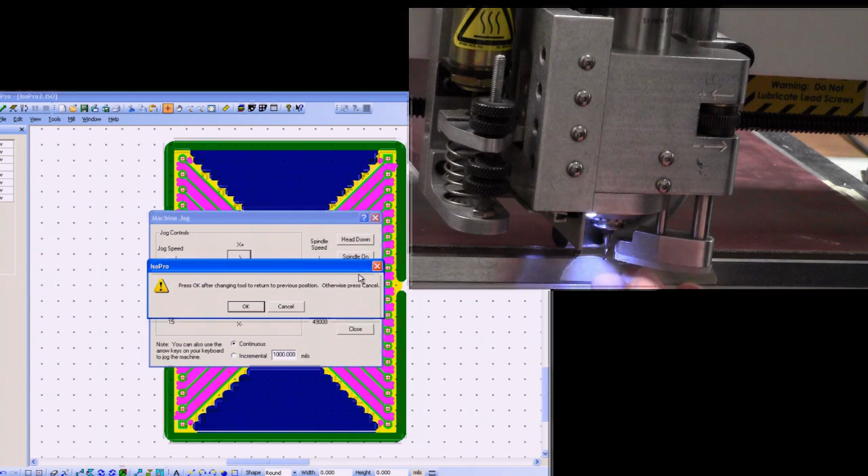Shows you how it's done. Like I said, you do exactly the same thing to the 625 tool. This is how quick it is to do. So, once you get used to changing tools, this is quite a quick process. See, it doesn't take me too long to actually do.

Again, move it back down to where he was doing all the test cutting. If you test cut in the same area, then you're more or less guaranteed to get a really good cut, a more uniform one throughout all the tools, rather than testing in different areas of the board. You only really need to test in different areas if you're going to be doing a huge board that's going to span quite a portion of the sheet. So again, this is a bigger tool, so the same settings apply.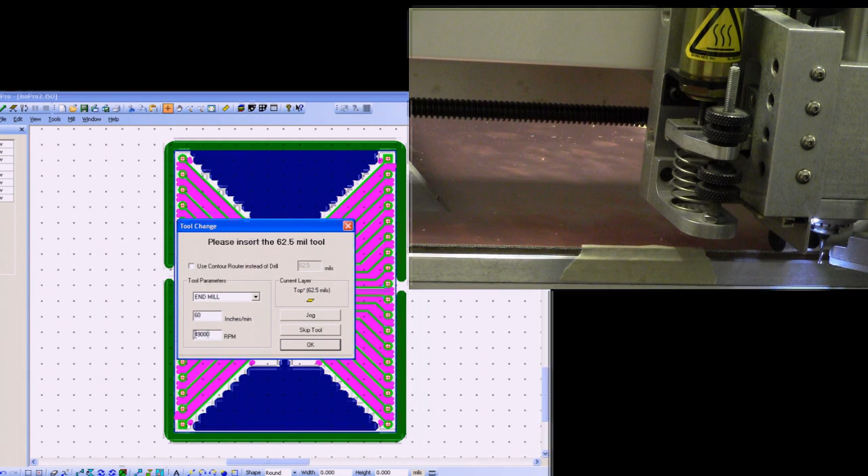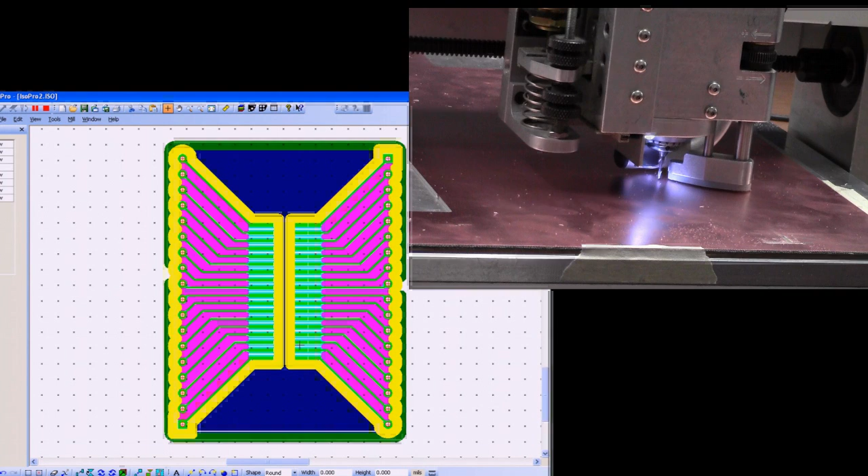Now, like I said before, it's up to you whether or not you want to remove the excess copper. For this particular board, I don't think that is really necessary, so I'm going to skip on to the contour route, and again we'll chop this board out. If you want to remove the copper, you'd run the rub-out layer, and you'd run through the same settings as the 62.5 tool. But we're going to skip over that, and then we're going to do the contour route.

So just like setting the drill bit, exactly the same for the contour route. So run layer, board outline for the contour route, and run. You select contour router, we set a speed to say, I don't know, 50, you'll be fine anywhere around that region. Set it to say 15 inches per minute. Contour routing using the 62 contour router, so router 62. Change the tool. There he goes.

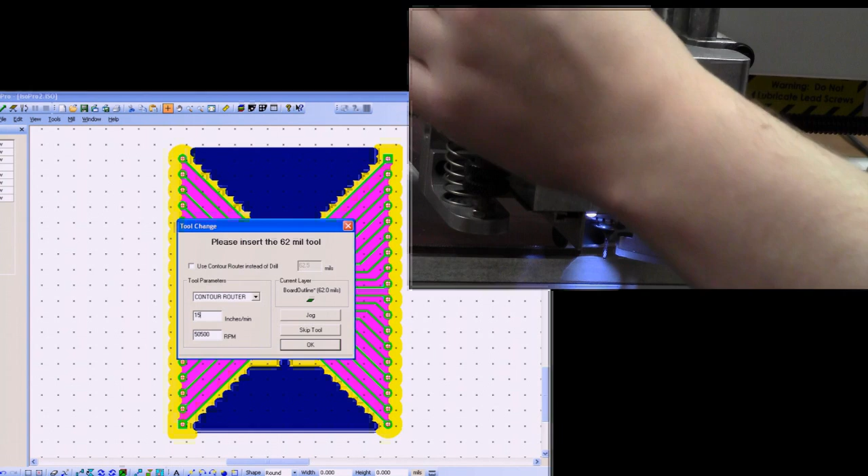And use your test material to set the depth, just like you did with the drill bit. Okay, there we go, so it's just through the board. The tip is through. You can feel that on your finger. Increase your solenoid, so you're no longer milling on the surface. You want to go through the board, so you need the extra downward motion. All our bits are set here.

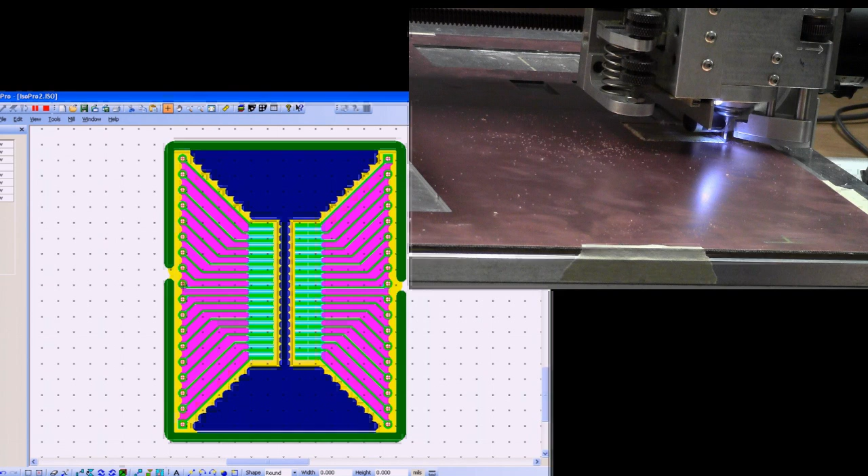Off we go. So this is a contour router. It cuts on the edge of the board, so it's going to punch through the board just like a drill bit, and then it's going to cut on the edge. Off it goes. Raises where the tabs are, where we cut the tabs out, so we've got a tab here, pull the tool up. Board has been cut out.

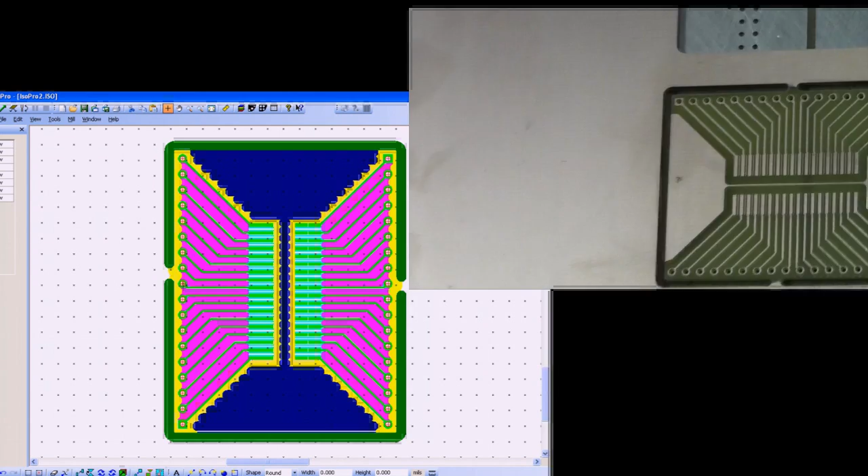Grab an air duster and clear off any junk that's on top. Inspect the work, and we can take it off the milling machine. So this is what we've been working on. Here it is, all nice and neat. As you can see, all the tracks are all isolated. There's some spurs in between the pads, but they can be removed with a scalpel. So let's take this off the machine, and here we go.

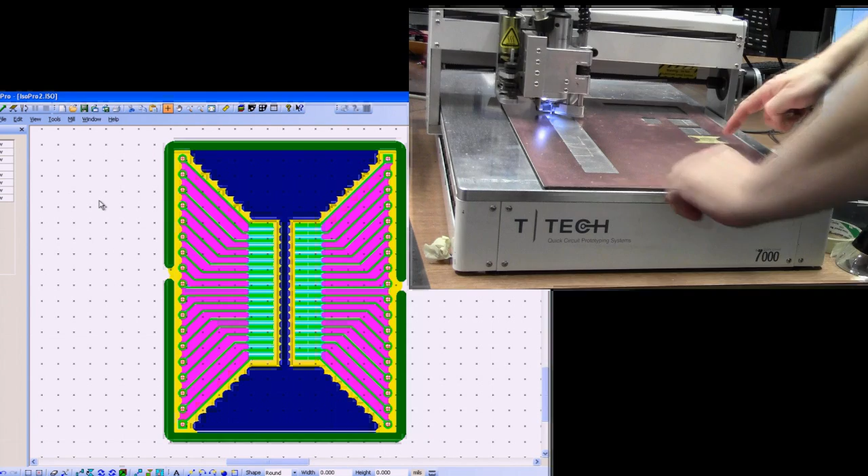So when you take the material off, make sure you go into the mill menu and you do material change. You use that if you're going to flip the material or take material off or put material on. Take off our masking tape. Because we had the tabs, this hasn't shifted, so it's nice and squarely cut. Get this out, pull it out, and just got to tidy this board up.

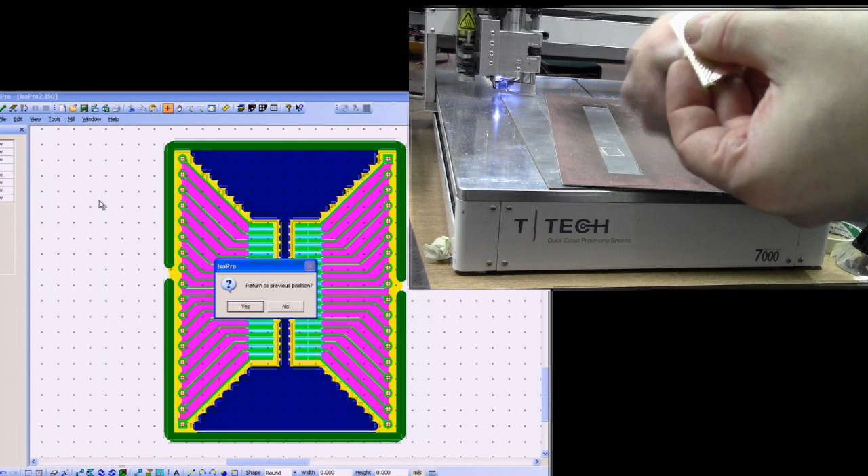So, scalpel, let's run it down the edges, clean up the burrs. Always use the knife away from you, that way you're not going to do any damage. Now you've got these little divots at the end. You can chop these off with a pair of side cutters, or you can use the scalpel to trim them off if you want. Side cutters are a little bit safer. And we have our board, it's all done.

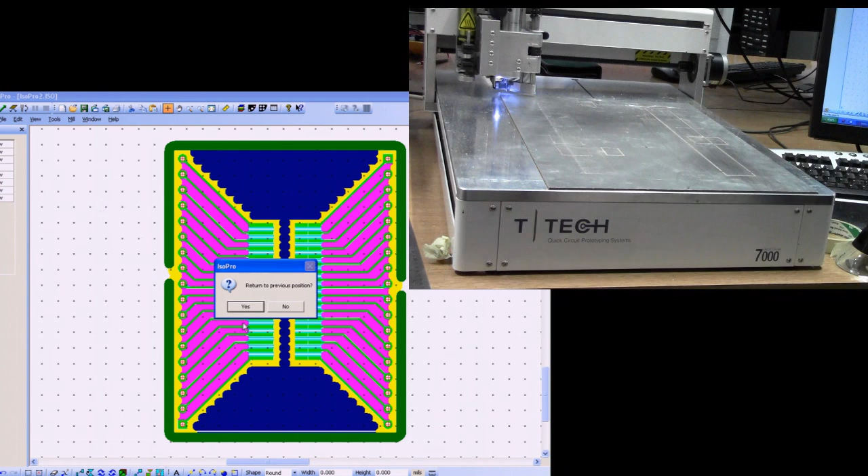All that you need to do now is prep the board for soldering, so you might want to tin it, or you might want to flux it. You can get flux spray with conformal coating, so you can do both at the same time. Give it a spray, give it a tin, and there you go. It's all done. And make sure that you return the head back to its home position when you're finished.